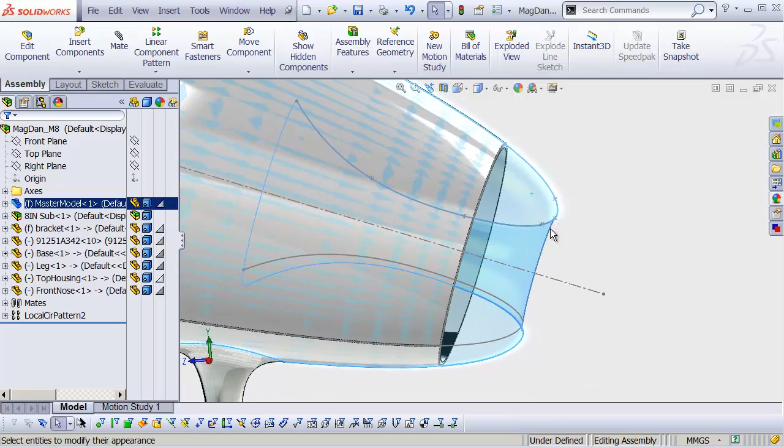But I think we should be able to minimize the visual impact of that by having this nose cone go all the way in to the inflection point down here in the middle, and then cut it there. The problem is finding that inflection point. We're going to need to get that.

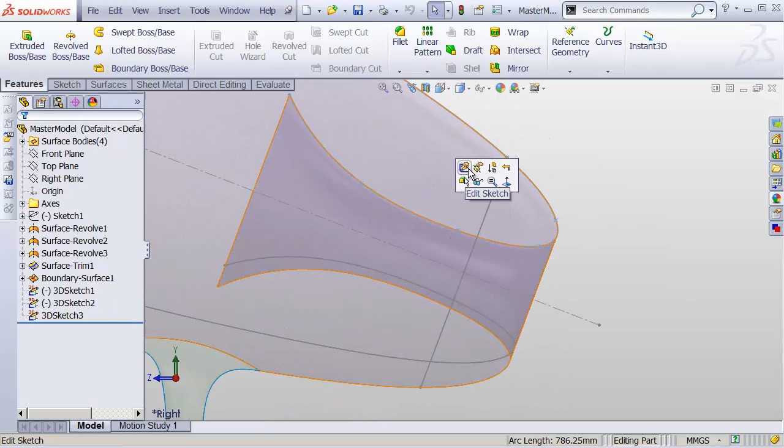So let's open up our master model in its own window. In this original sketch that we used to create that shape, what we need to do is find the point where this finally inflects, so that we can use that to chop this thing in two. So let's go ahead and draw a line straight across here.

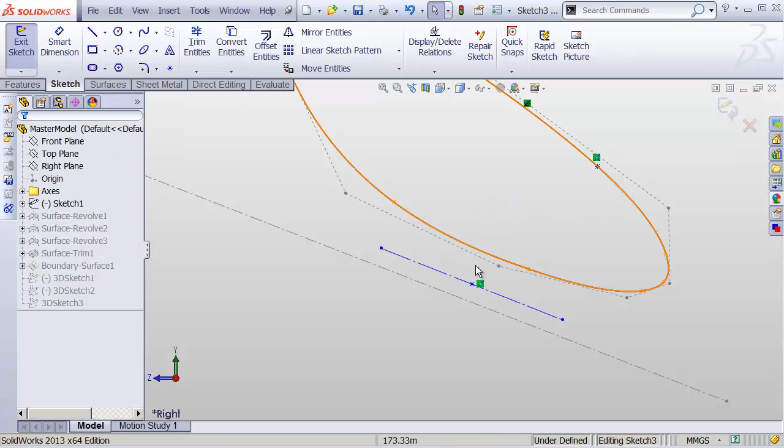Let's make that a center line, a nice construction line. I'm going to grab a point and put it at the midpoint of that line. Then I'm going to right-click on my spline and lock that down, make it fixed so we can't accidentally move it. We might want to change it later, but for now let's just lock it down so we don't make any mistakes here.

I'll click this center point we just created, control-click on that spline, make those coincident. I'll click on the center line there, control-click the spline, and make those tangent. Finally, take this line, control-click on this center axis, and make those parallel.

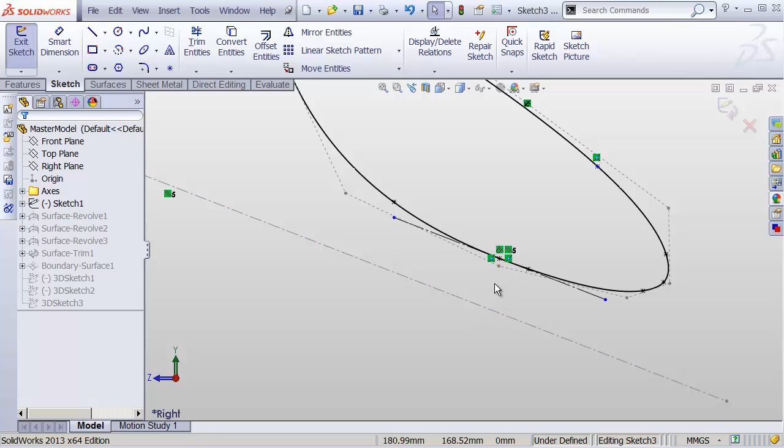And now we know exactly where that inflection line is. This thing is fully defined. We know exactly where this thing needs to be cut. So we can exit this sketch. It's going to rebuild, and since that's construction geometry, it's not going to change our form. It's just going to give us a point where we can easily cut this thing in two, so that the interior piece of this horn can be separate from the exterior piece.

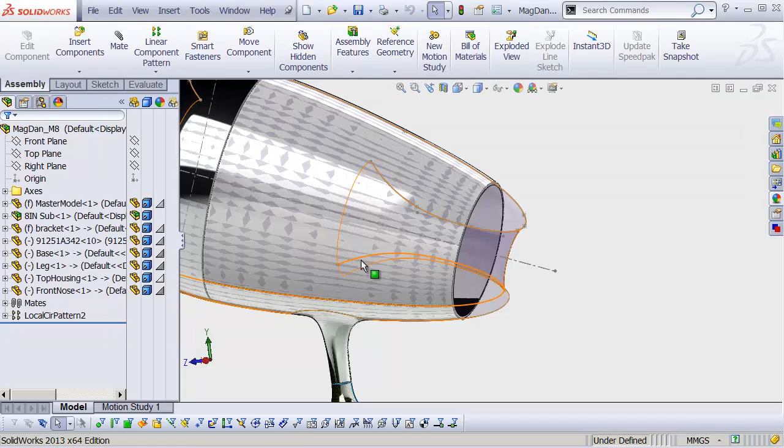If you don't know what I mean, just wait, you'll see. Close this up, we'll go back to our main assembly, and let's create these two last exterior pieces anyway.

So insert components, new part, front plane, cancel. We'll rename this one our rear nose. Right-click, right-click, and save that in an external part file first of all. Then open that up in a new window. We'll insert our master model.

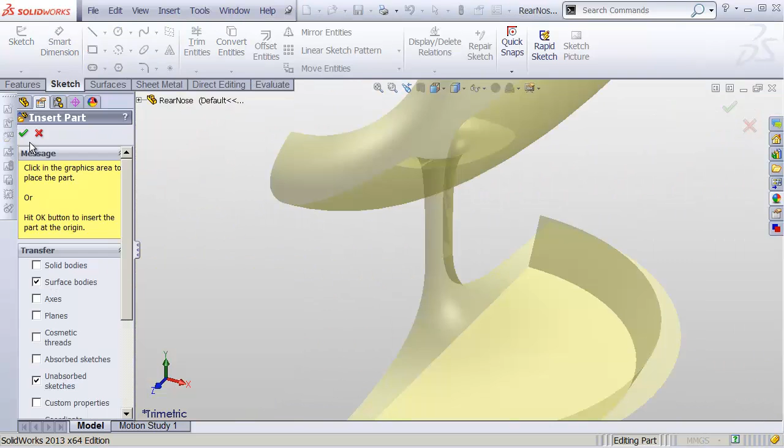Just need the surface bodies and the unabsorbed sketches. Once again, we only need that big piece in the middle. We don't need the other pieces, so we can delete those out. And we can trim this surface back.

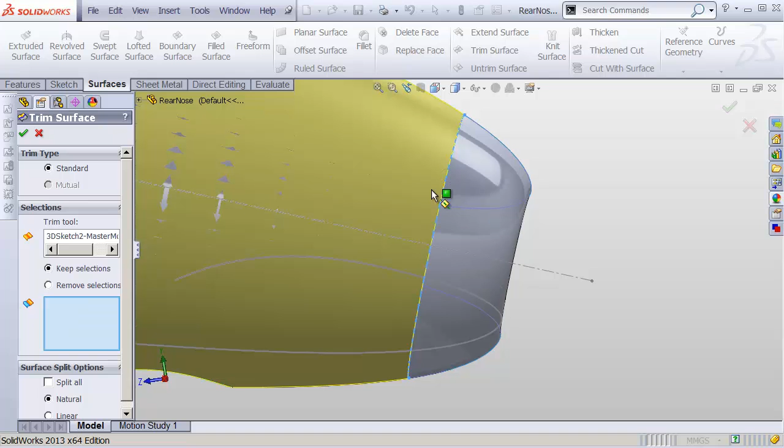Let's go to the Surface Tools, Trim Surface. In Standard Mode, let's clear this out, because in the Trim tool we'll choose this edge back here. Make sure we are keeping selections, and then click on this rear nose cone area. Then hit OK, we're left with just that bit.

Now, finally, we are going to need to cut this, and I just realized when we imported this, we didn't bring in that original sketch. So let's go back and change that master model import feature. Just say Edit Feature. We brought in unabsorbed sketches, but we didn't bring in absorbed sketches. Let's bring those in too this time.

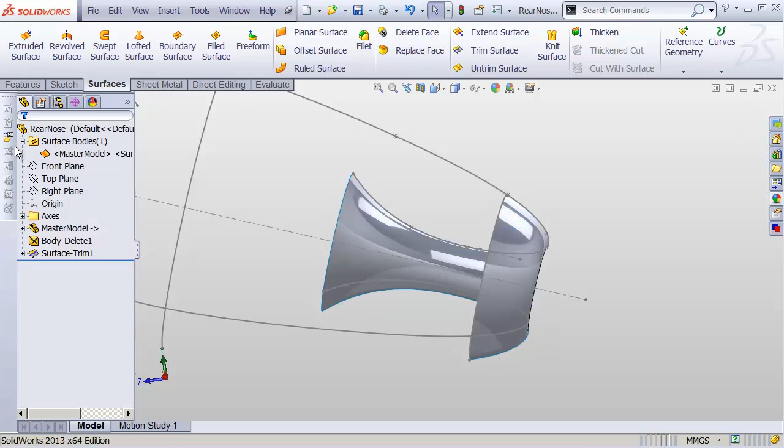That's going to bring in this piece here. This one was absorbed into a surface revolve, if you'll recall, that's why it didn't come in. But all we have to do is tell it, and there it is.

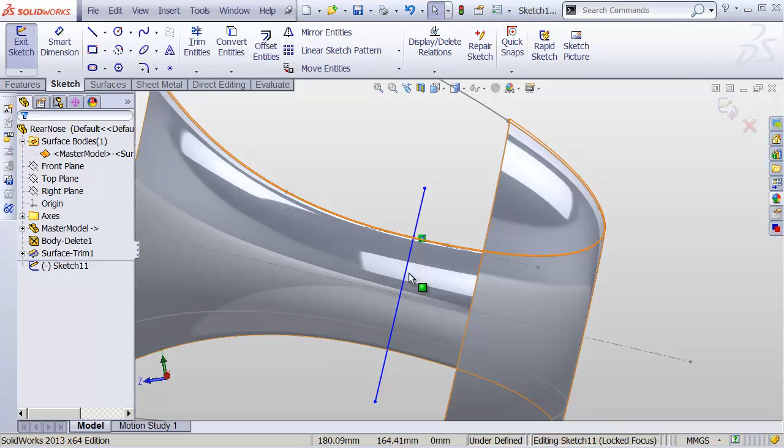Now let's go to our right plane and create a sketch. On that sketch I'll draw a line. We'll make that line coincident with that new point we just created at the inflection of this curve. Click that, control-click the center line of our body, and make those perpendicular.

And now that's pretty much fully constrained. The ends can move, we'll just make them plenty big, and that's fine. Exit that.

And we can trim again. Do Trim Surface, this time Standard Mode. Trim Tool is that 2D sketch. Keep selections, click on this piece, and hit OK.

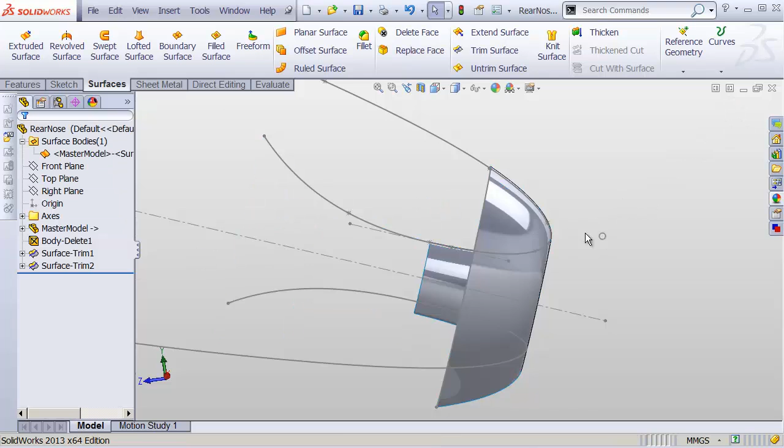And finally we just need to make this into a solid. And as you well know by now, there's more than one way that you could do that. Let's do it in a way that we haven't done it before. This time let's go up to the Thicken tool.

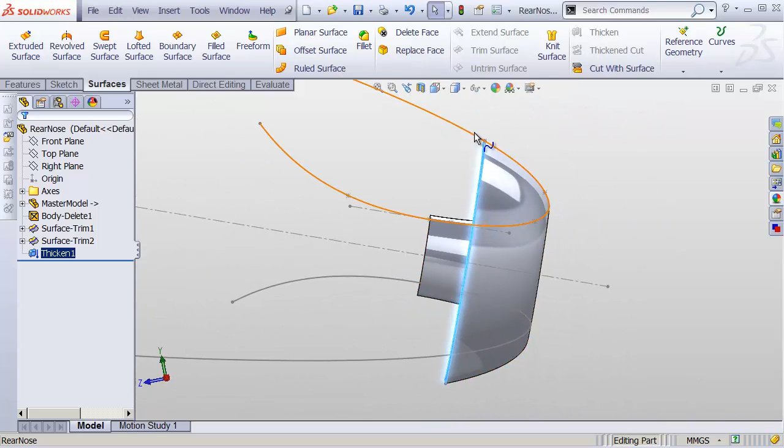We'll grab this surface, we'll thicken it by 3 millimeters. Hit OK. And as we know, this face is not necessarily going to meet up perfectly with the rest of this body, because the rest of this body actually has a perfectly straight cut straight down this way. And we can't easily extrude a cut that will get this entire thing flattened out.

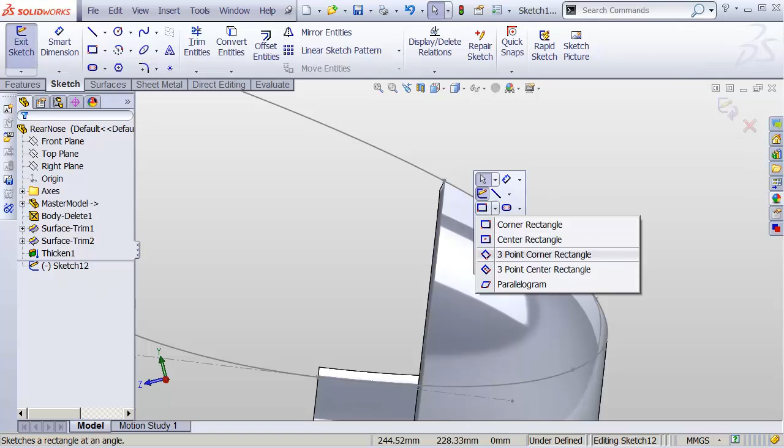So what we'll have to do is revolve it, which is still really easy. We'll go to the right plane, create a sketch, and we're going to create a rectangle. I'll do a 3-point corner rectangle, that's where I can click this point. I'll click in here somewhere and then out here to finish up that rectangle.

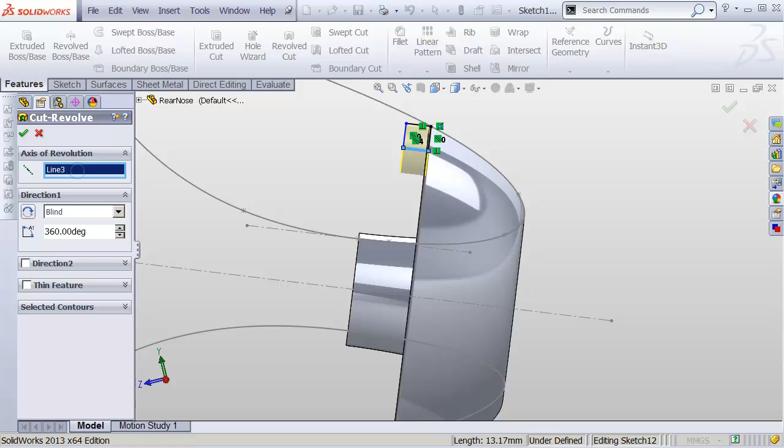I'll take the bottom edge of that rectangle and the center line of our body and make those parallel. And now we're really close. Now I can just take this sketch and go to Features, Revolved Cut, and Axis of Revolution will be the center line. That's going to go all the way around and just cut this thing so that it's nice and flat. Perfect, so now this thing's going to meet up exactly the way we need it to.

Finally, let's go ahead and add a fillet to this edge. We'll make that a 1 millimeter fillet, just to match with all the others we've been adding. Next, we'll go to our mirror command under Features.

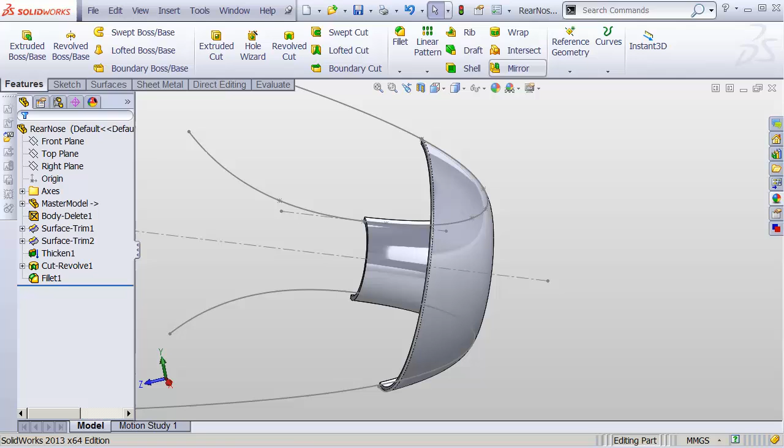We'll go to the right plane, Bodies to Mirror. We're going to mirror this body. Make sure to merge solids. Hit OK, we're left with our completed part.

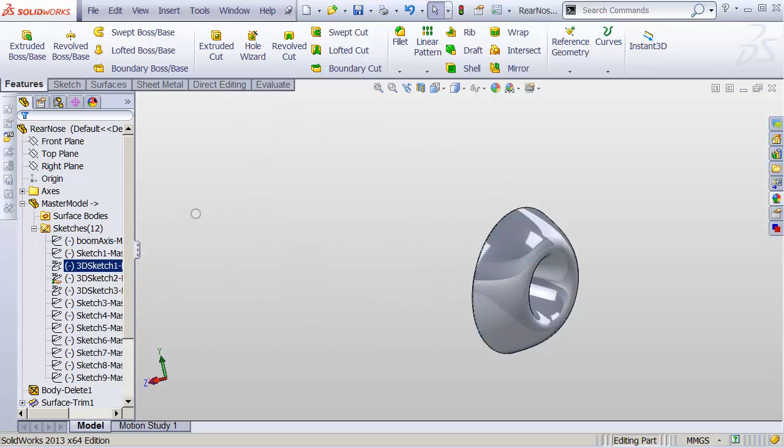Looks really nice, and it's all in draft, amazingly enough. We'll go into our sketches here. Let's just hide all of these sketches really quickly so those are out of our way. That looks good, close this up.

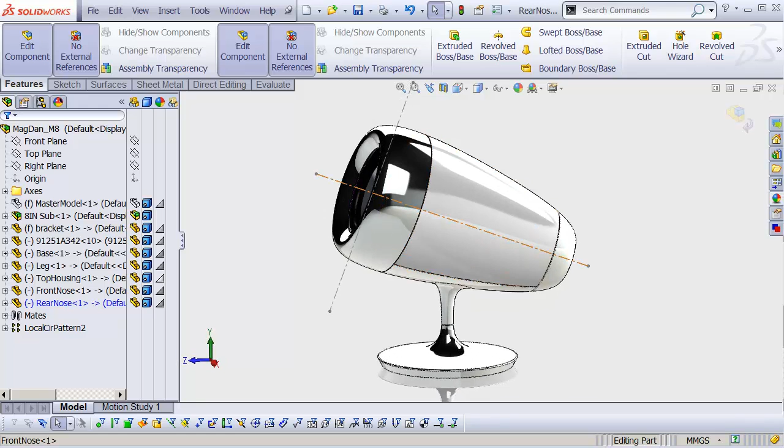Yep, let's go back to our main model here. Hide the MasterModel. Let's go to our metals again, look at our chrome, add our chrome plate to the back of this thing. Alrighty, now at least the outside of this is looking flippin' sweet. And we just got to add that one last component on the inside before we actually start building out some mechanical features.